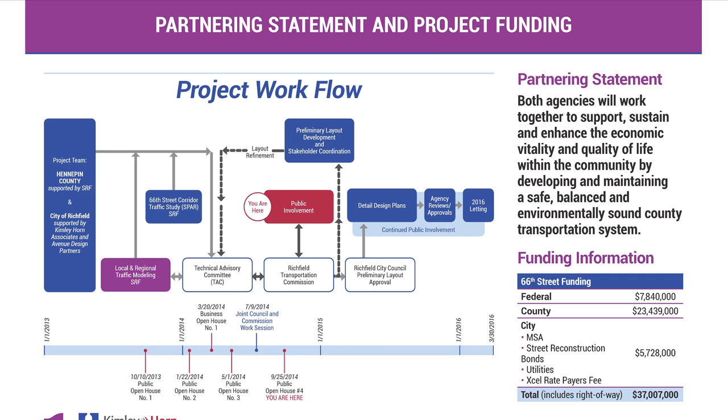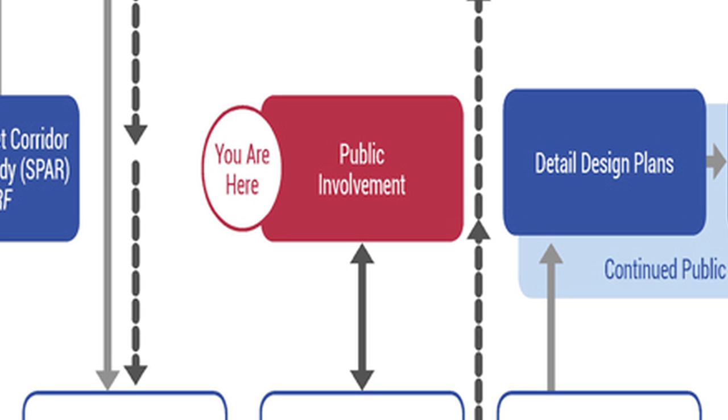The first slide explains the project workflow. As you can see, the project has been in process for quite a while. We are currently in the public involvement stage, preparing preliminary layouts and presenting at public open houses for comments and review. After the concepts have all been recommended by the Transportation Committee, we will be going to the City Council for preliminary layout approval and then going into final design.

The project itself is funded in several ways. There's federal money that has been awarded to the project in the amount of $7.8 million. Hennepin County will be contributing $23.4 million, and the city will be contributing $5.7 million through various means such as state aid, gas tax, street reconstruction bonds, utility rates, and Xcel rate payers fee.

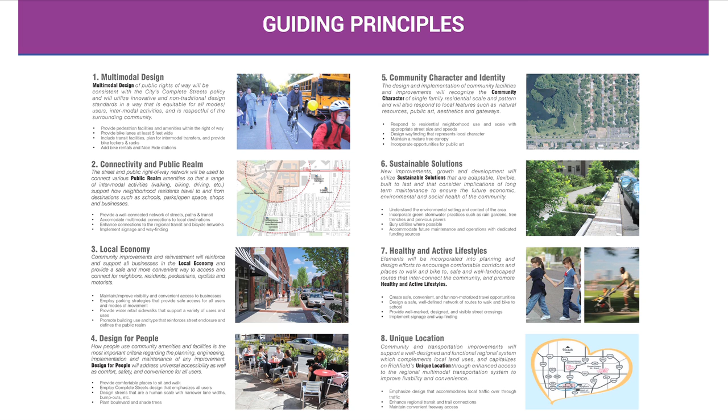The guiding principles were developed in coordination with the advisory commissions and the city council, as well as business groups in town and resident input. They are meant to help guide preliminary design of the projects in Richfield.

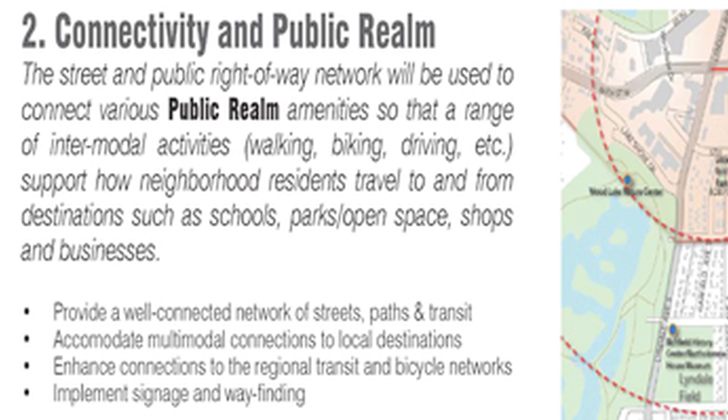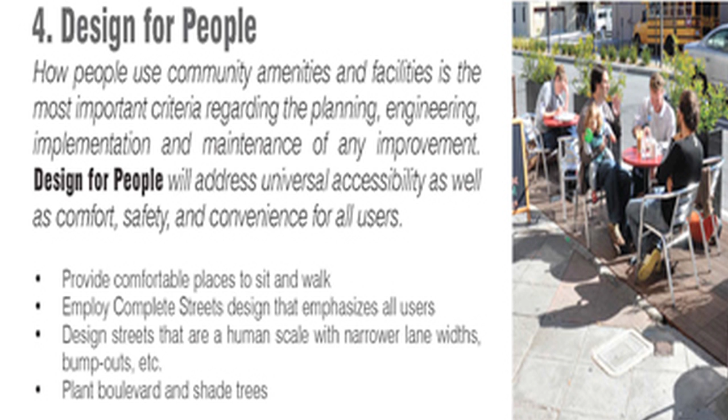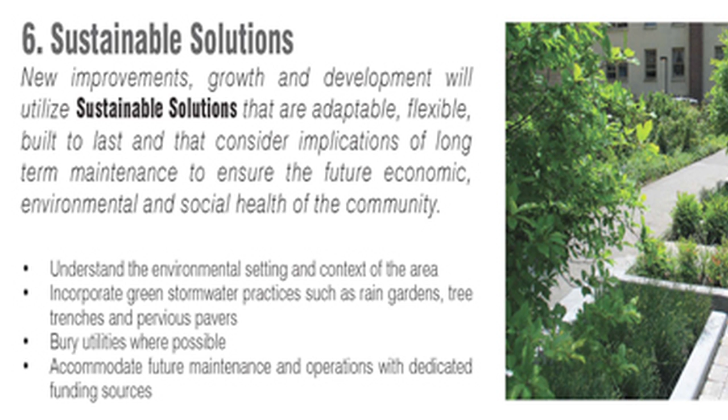They include multimodal design, connectivity and public realm, local economy, design for people, community character and identity, sustainable solutions, healthy and active lifestyles, and unique location.

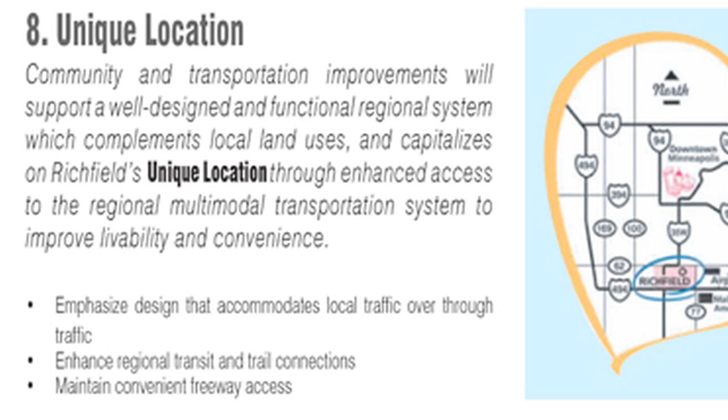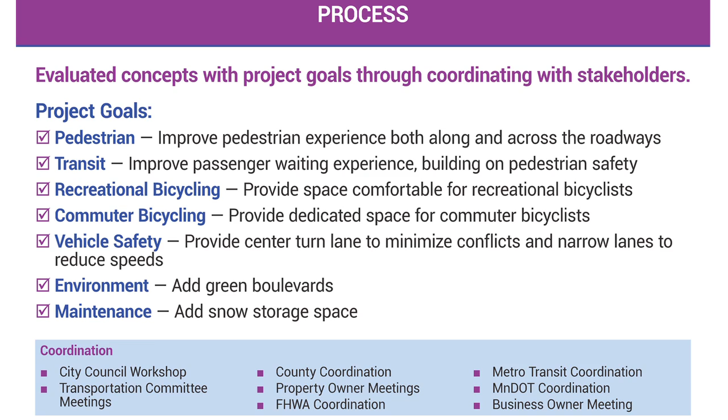The project process involves evaluating concepts with the project goals through coordination with stakeholders. Specifically, the project goals include improving pedestrian experience both along and across the roadways, improving transit passenger waiting experience and building on pedestrian safety, providing space that's comfortable for recreational and commuter bicyclists, providing center turn lanes to minimize conflicts, narrowing lanes to reduce speeds, and adding green boulevards for snow storage and maintenance.

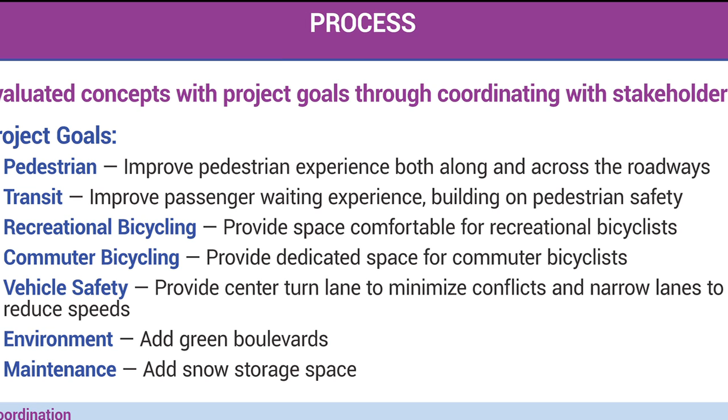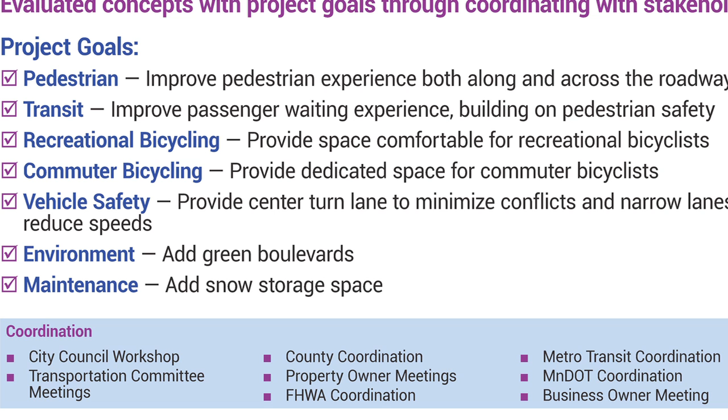Staff is in coordination with the City Council, the Transportation Committee, the county, property owners, Federal Highway Administration, Metro Transit, MnDOT, and business owners along the corridor. There have been several open houses to date on the 66th Street project.

Common themes from previous public meetings include the desire to minimize property impacts, minimize acquisition of properties west of I-35W where right-of-way is tight. Complaints include sidewalks that are too close to the roadway, sidewalks that are not well maintained, not enough space for snow storage, and high traffic volumes and speeds that make crossing the road difficult as a pedestrian and bicyclist.

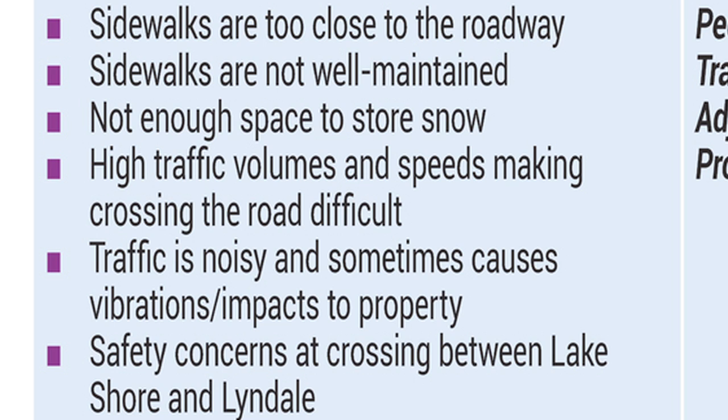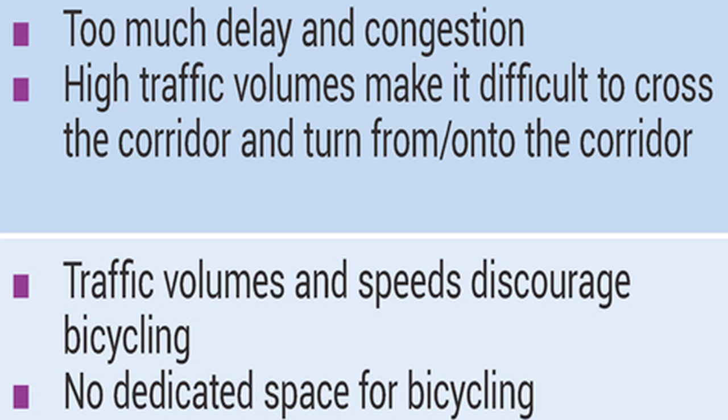Traffic is noisy, causes vibrations and impacts to properties located close to the roadway. We heard safety concerns specifically about crossing between Lake Shore Drive and Lyndale Avenue. Drivers complained of too much delay and congestion, and high traffic volumes that make it difficult to cross the corridor and turn from and onto the corridor. Bicyclists complained about traffic volumes and speeds that discourage bicycling in the corridor, and the fact that there was no dedicated space for bicycling.

Using the guiding principles and public input, we've identified the following community problem statement: safety and comfort for pedestrians, transit users, bicyclists, and drivers is compromised, and users are not satisfied with the way the existing roads operate. Our goal is to address the safety in design through the consideration of speed, conflict points and crash patterns, and space allocations.

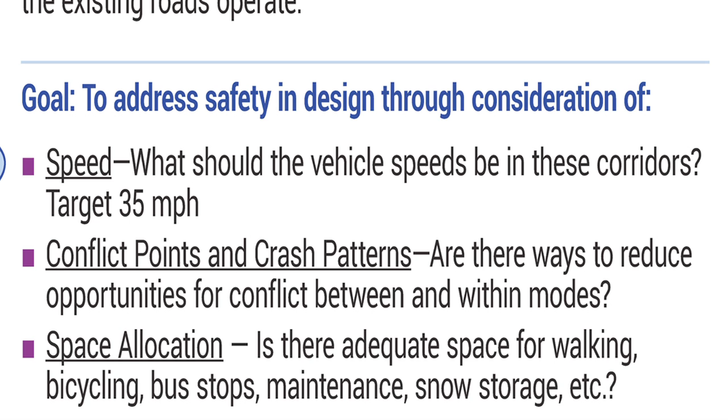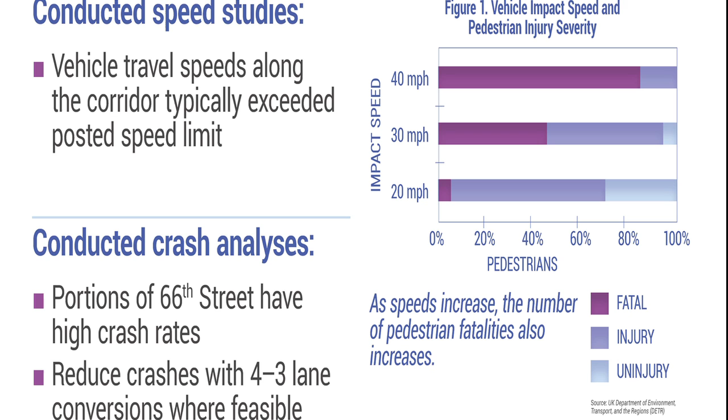In preparation for preliminary design, we've conducted speed studies to determine what speeds vehicles are traveling through the corridor, and conducted crash analysis to examine what crashes have existed in the past and how we could potentially reduce those in the future. The slide regarding conflict points is to better explain why different intersections can improve safety.

None of the major intersection designs have been decided yet. We are examining both traditional signals and roundabouts at the major intersections to see if there are benefits to each.

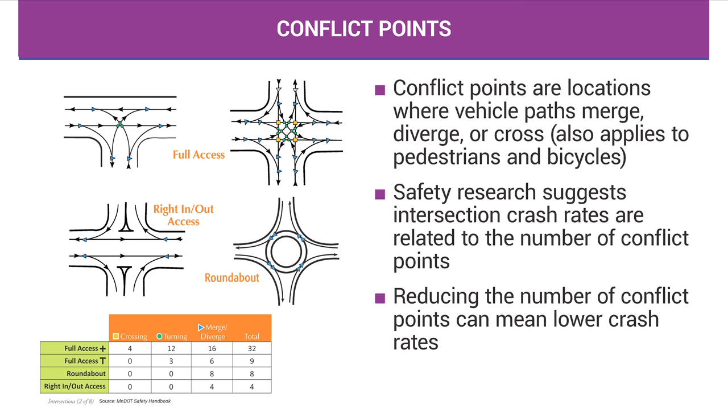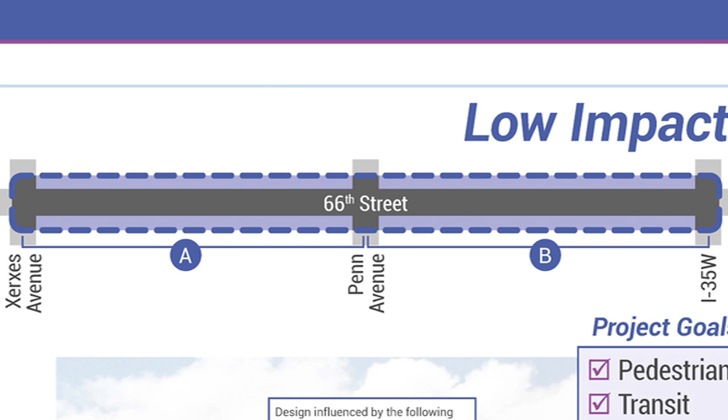West of I-35W, right-of-way is more constricted. This led to several problems. When Concept 2 and Concept 4B were first proposed for this area, there was considerable opposition regarding the taking of property along the corridor. It would have resulted in 18 homes being removed. The county was tasked with coming up with a low-impact concept that eliminated or drastically reduced the amount of full property takes needed to accomplish a road reconstruction project.

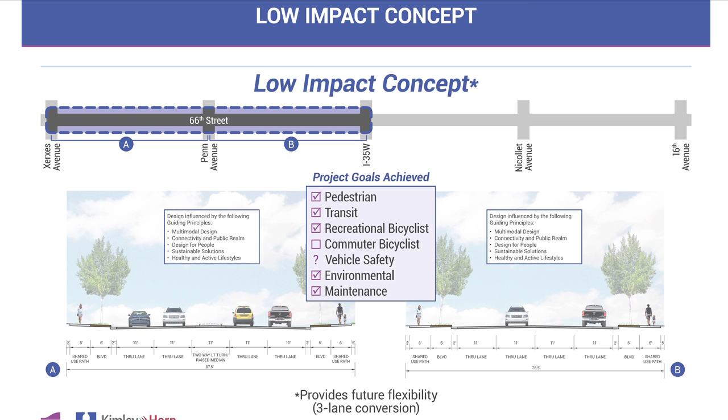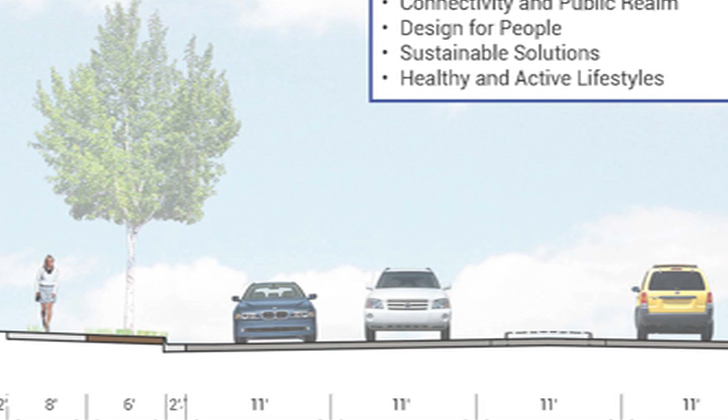This low-impact concept can be broken down into two parts. Part A, from Xerxes Avenue to Penn Avenue, would consist of the 5-lane or 4-lane divided section that's out there today, 2 through lanes and a left turn or raised median in the center. The sidewalks would be pushed back about 6 feet on each side to facilitate a 6-foot boulevard for snow storage and landscaping.

On the north side, a shared use path would provide some sort of in-corridor bike facility. This would most likely be used by recreational bicyclists, children going to and from school, and bicyclists trying to get to specific destinations along 66th Street. This concept does not include on-street bike facilities. On the south side of the road, a 6-foot boulevard and a 6-foot sidewalk would be included.

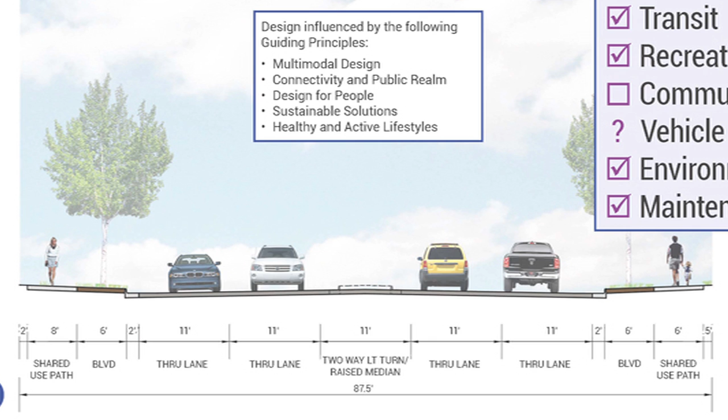In Project Area B, between Penn Avenue and I-35W, the right-of-way is further constricted. This would mean removal of the left turn lane that was included in previous concepts, resulting in a 4-lane undivided roadway similar to what exists today.

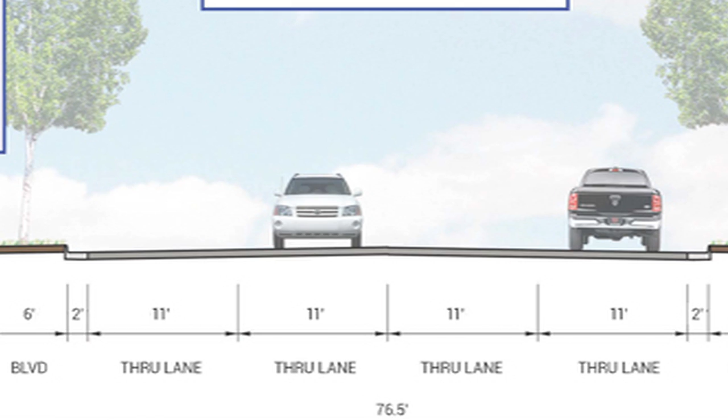Boulevards would be included behind the curb to help with winter maintenance and include landscaping. On the north side, a shared use path would facilitate some sort of bicyclist accommodation, and on the south side, a 6-foot sidewalk would be maintained.

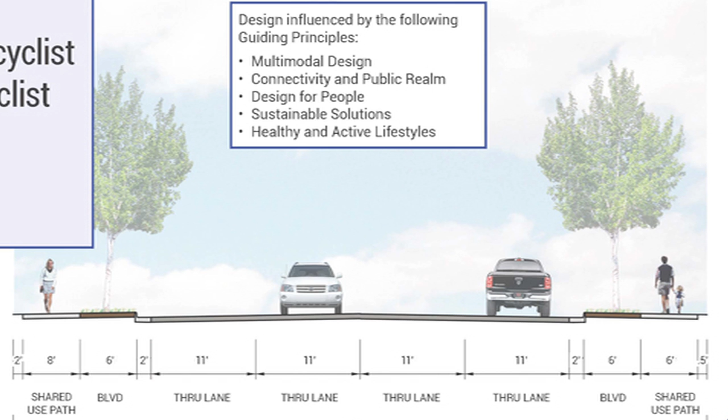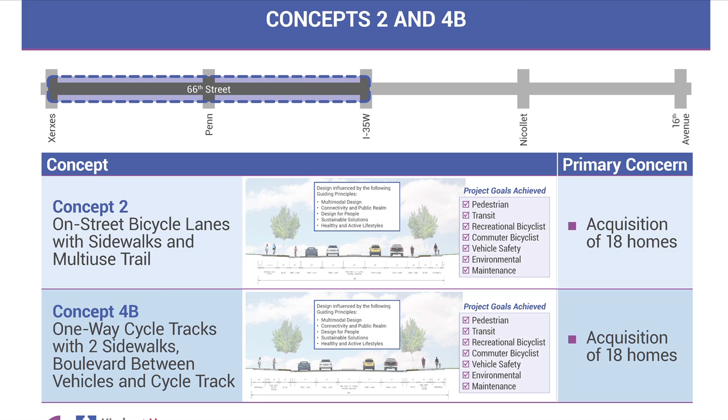Concepts 2 and 4B, which were first proposed for this section between I-35W and Xerxes, would have required acquisition of 18 homes and partial acquisition of properties from Penn to Xerxes. Although it facilitates all of the project goals that were originally proposed for the project, this acquisition of homes and property was a primary concern for the City Council.

Listening to concerns from previous open houses, the county came up with the low-impact concept to address the acquisition associated with Concepts 2 and 4B. Concept evaluation is still ongoing, including further reduction of property impacts and how this design could provide future flexibility. For example, converting some sections to a 3-lane conversion in the future will allow for on-street bike facilities.

There are some concerns with this minimum impact layout, including existing crash concerns by not including a left turn lane in the section from Penn Avenue to I-35W. However, spot improvements are feasible.

Full access control at Oliver Avenue by extending the median through the intersection is proposed. Improving sight lines at different intersections, restricting turns during congested periods, improving signal timing and phasing, and implementing red light running enforcement are all proposed as spot improvements to safety.